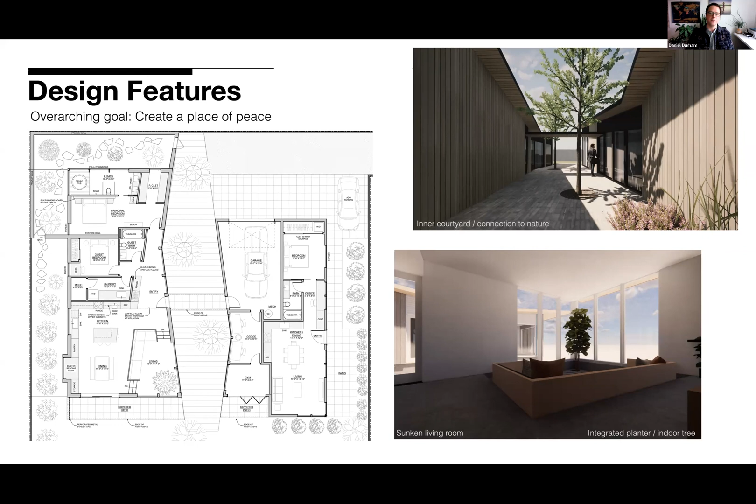So I don't have a ton of time to go into all these cool details, but they're there if you want to hone in on something that interests you. But I thought I'd speak to a couple that are directly related to the IDP process. The first one is because this is a modern home, it has a lot of glass, and a lot of glass that faces south and east. So very early when we modeled it, we realized we had a problem with overheating, or a really high cooling demand. So because IDP is an iterative process, we were able to catch this very early on and adjust the design to overcome that challenge.

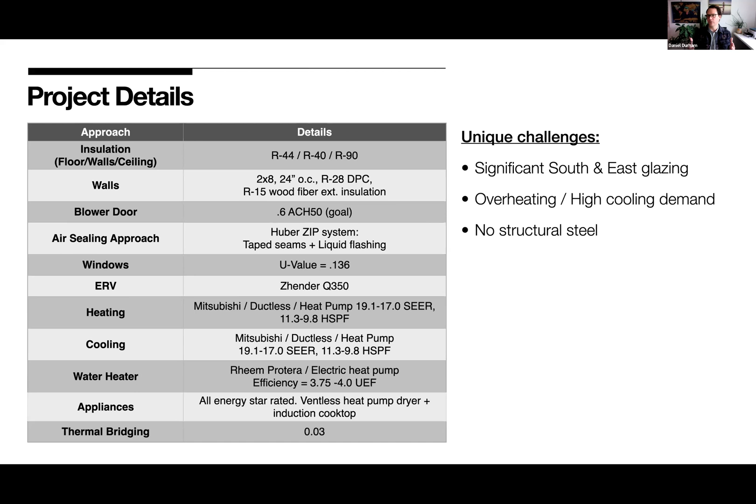So getting into the meat of the presentation here, the IDP principles. I thought it'd be worthwhile to step back for a moment and look at the alternative, which we're all used to, which is the design, bid, build process. That's what I'm most familiar with, and I think that's probably what most people in the design community in this area use. Probably 80 or 90% of them are some variation of that.

What that looks like typically is a client will select an architect or designer, go through programming, schematic, design development, sometimes even as far as construction documents before starting to bring in other professionals to assess the project, such as a builder for pricing or engineering or other trades. The challenge with this is oftentimes a project has so much momentum, so much time, money and energy put into this design, and just emotional inertia, that by the time you reach that point, people are very reluctant to make changes, and they're also very expensive to make at that point.

So what we see far too often with design bid build is that projects will get priced very late in the process and they'll get axed because the client couldn't even afford what got designed. Or another scenario we see is all the cool details are basically stripped from the project just to make the project happen. So I think that is really the epitome of the deficiency in the design bid build process.

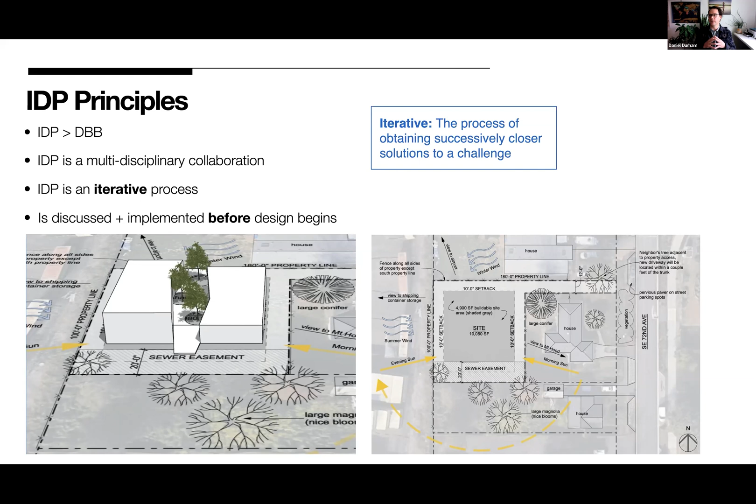The ideal time to implement IDP from our experience is before design even begins. We often share with potential clients that the best piece of advice we can give you is to hire your contractor as early in the process as possible. In fact, we would even recommend that they're hired at the same time you hire your architect or designer. So we'd love to see our industry move more toward that.

So key takeaway number one for me in this process was really the immense value of building one unified team that communicates and cooperates together. I could not say enough good things about this team, Guggenheim's and Dyer Studio and Green Hammer, and the synergy that we created. It was really unique. We had these really free-form discussions and open dialogue, and all ideas were on the table. I think this key step was really the foundation of success.

Key takeaway number two: there's real value in choosing to work with an energy consultant. Looking back on what made the project successful, we had one key meeting. It was actually our kickoff meeting, which Alex Botzel led, and he really patiently schooled us on the principles of passive house and things we should be thinking about early in conceptual design and building orientation. That meeting really set the tone for the project, got everyone excited and aligned on a common goal.

Another real benefit is the opportunity to energy model, which is not just guesswork or relying on your HVAC contractor's load calcs. This is very scientific. And because it's an iterative process, we would typically do some design, have it modeled, get feedback, then tweak the design, get it modeled again, more feedback, and subsequently the tweaks get smaller and smaller. That's really the epitome of an iterative process.

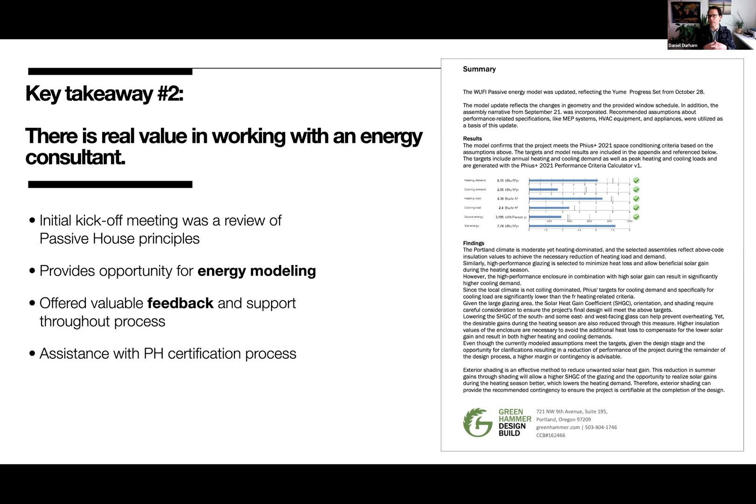Key takeaway number 3 for me was that the continuous insulation and continuous air barrier strategy really has to be considered early in design. Sometimes a project has been designed and then a client will watch some YouTube videos, get excited about high performance building, and decide at the end that they want to make it high performance, and that's just simply not how that works. Unfortunately, I think this is a big reason why high performance building gets pegged as expensive when it's really not if it's done during the design process.

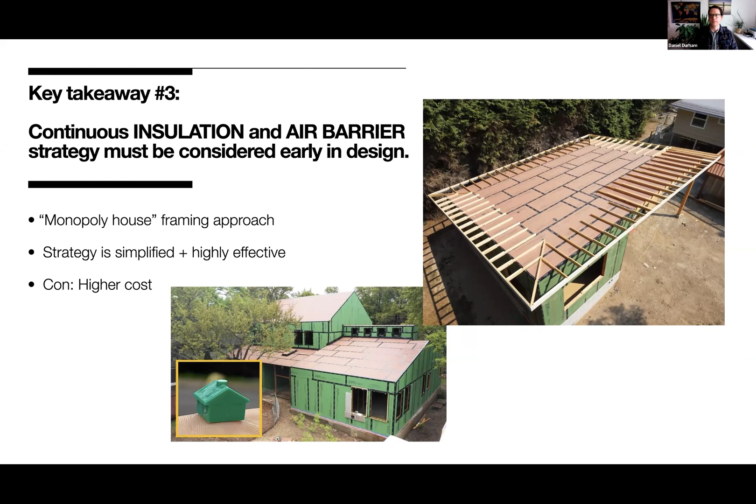From my understanding, this is really the most effective approach for both insulation and air barrier. The one con is it is at a slightly higher cost because you are essentially framing the roof twice, if you will.

So, wrapping things up with just some pros and cons that I found from my own experience with IDP. I think first and foremost, what I love about IDP is that it's proactive. From our experience, we found design-bid-build to be inherently very reactive, and we spend a lot of time and energy and bandwidth sending out RFIs and trying to get information and track down details that maybe we thought should have been included in the first place, where in IDP, that's all done collaboratively and on the front end. And because it's proactive, it's more efficient. Those things aren't being done during construction, but ahead of time.

IDP is naturally a more collaborative approach, which in turn improves relationships. It optimizes build quality, optimizes timeline, and the really big one here is that it optimizes budget and estimating, because it's not just done once at the end, it's done early and it's done often. And because of all that, it creates fewer change orders, fewer unknowns, and fewer RFIs.

So a few cons, if I had to find a couple: it is more time on the front end. That's not to say that it's more time in general, it's just more time up front. And let's be honest, it is new and different to a lot of people. It's not what people are used to, so there is a learning curve. So that does require some educating and selling your team on its value.

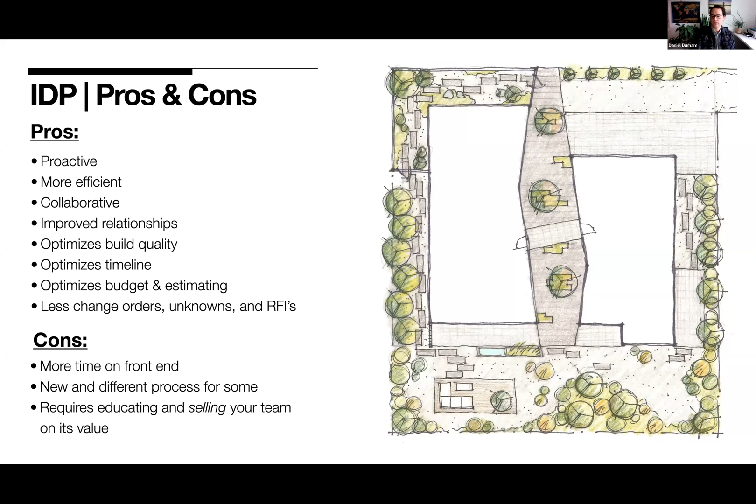So I wanted to open up to any questions out there. There are some really awesome questions, actually. They're perfect. One from Patricia was: I always try to get contractors on projects early, but the difficulty is that contractors don't get paid for their time before construction. So how do you suggest handling this? Maybe hold that in your mind for a second, Daniel, and I'm going to ask this next question because I think you can answer both in a combined way, and I have thoughts too. On the IDP process, does bringing in more professionals for more of the early process mean pre-construction costs are higher, but later costs and timeframes will be lower? That was from Misty Ersman. So maybe take a shot at those, Daniel.

That'd be awesome. Yeah, to answer the first one, that's close to home, because I think that's really a belief more than anything, that contractors aren't paid for this. A couple years ago, we switched to actually charging for cost estimates and early consultation. I think we're probably one of the few that do this, but it's a ton of hours each year that we were spending just donating to projects that a lot of times didn't go through. So I would encourage you to talk to your contractors about charging for this process. It's their time. You're in business to make money. There's no reason that we should be giving away hours and hours of consulting for free.

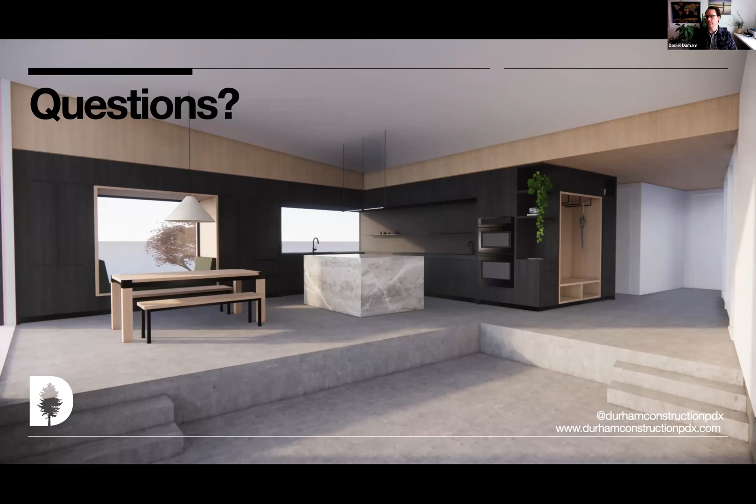Yeah. Great. I think that's good. We probably should get moving on. Those are really fantastic questions. There's some other general ones maybe we'll hit at the end, depending on timing. And thank you, Daniel. It was a really cool project. I can't wait to check that one out, both in construction and then after. It's a really beautiful design, and love the concept. So yeah, super exciting. Thanks, Evan.

All right, Melissa Mulder-Wright. So really pumped about this project and presentation too. Melissa's really passionate about this work, and excited to see what you've got for us today. I think you'll get some good questions. A lot of people are thinking about wildfires these days, and hopefully the heightened snowpacks will reduce that this year, but it's definitely a part of design and construction moving forward. So this is a really important topic for everybody. So thanks for bringing it to this SHP day.

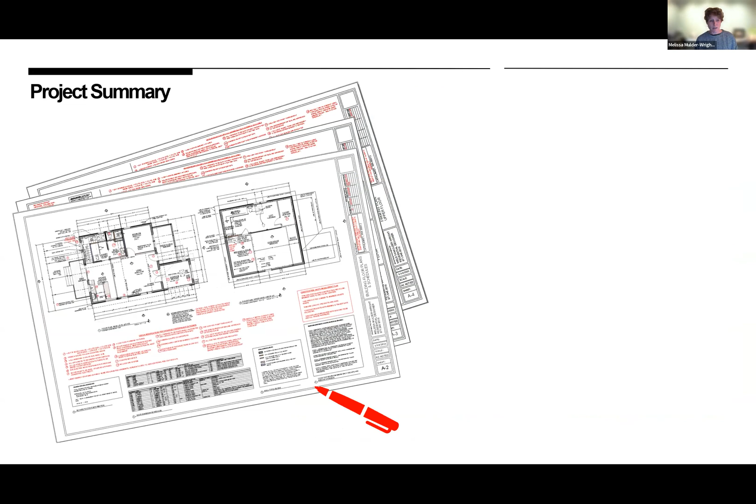And he wanted it to blend into the adjacent properties. He wanted it to be pretty simple, wanted it to look like a cabin, wanted to be able to do lots of gardening on the property. And he also didn't want his house to burn down. And he was also concerned that being in the middle of nowhere, his power would go out and he wouldn't have any resources. And so those were some of the main things that we considered during the design process. Like I said, we ended up not going through with the construction of this building.

I'd like you to think back to what 2020 was like. That was when we were working on this design process. We started late summer of 2020. And what that meant is we were all mostly inside. When we got together, we were masking. Everyone and their dog were trying to retrofit their homes to make offices in their homes, trying to build something better. People were not spending money on vacations, and so they were wanting to put money into construction. And at the same time, manufacturing companies were not able to bring people in. And so we had a lot of materials shortages.

I also want to remind you that Labor Day of 2020, we had a lot of wildfires around here. And so if you are somebody who has a property in the middle of nowhere with lots of trees and you want to build something new, this was a pretty frustrating time. And so while we put a lot of effort into designing the best home possible, in the end, the homeowner decided that the easier thing would be to order a kit home and have the whole thing show up on a flatbed truck. And then they could construct it easily and not have to worry about the material shortages and things like that.

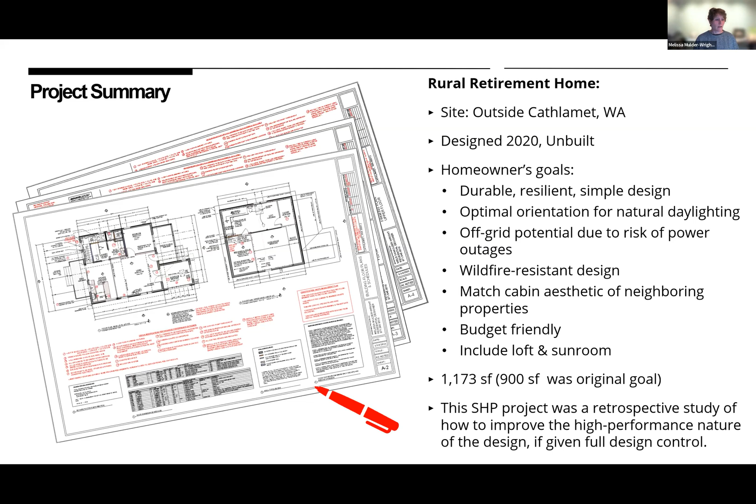So for this project, I just went back and I redlined all of the pages in terms of how we could make this a better project. And some of that is interesting, but actually I think the things that are more interesting are the things that I'll talk about today in terms of how to really maximize the off-grid potential and the fire resistant design features.

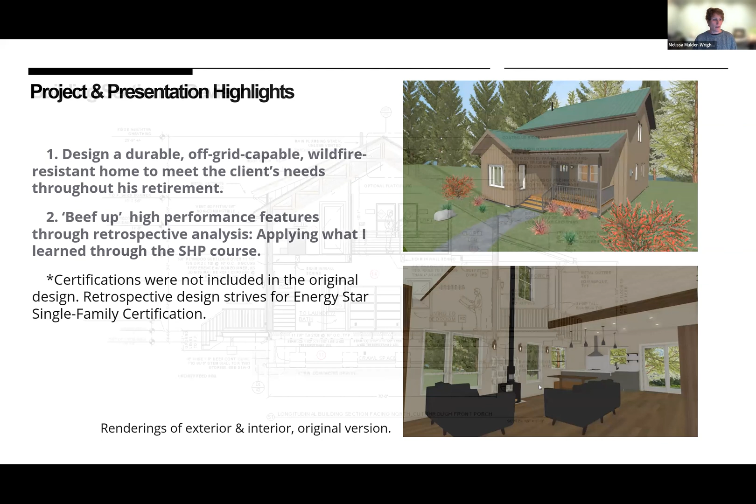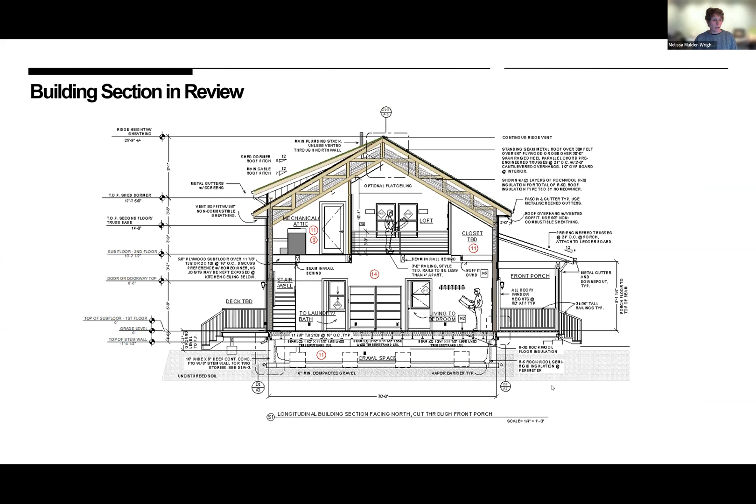For my Sustainable Homes Professional project, I went for Energy Star single family certification. Just a side note, in the learnings that I've had since that time, I would actually think that this would be a great passive house project because passive house focuses a lot on really maximizing durability, airtightness, and a lot around healthy materials. And I think that the fire resistant design would also be a great thing to highlight. I'm going to kind of cruise through some of these slides to get to the juicy stuff.

So in the original design, one of the features that I was working around, the homeowner had a set of windows that he'd already purchased, and he wanted all of those windows to be used in the home. When I was able to go back as a retrospective look, I could switch out all those windows and choose things that would be better for the performance of the house and fire resistance of the house.

Some of these would be using triple pane windows that are tempered. That's great for the air sealing of the house, especially if you're mindful of sealing around the windows. It's great for R value. In the original design, we had specified exterior insulation around the entire house. In the new design, I just beefed that up to get more R value out of the process.

Specifying things like good balanced ventilation, that would increase the healthy interior of the house. It would also improve the durability of the house. And all of this is to think like, if the house is in the middle of nowhere and your power goes out, you want this house to have a nice cozy sweater on it. So you're maintaining good interior air temperatures. You want it to be warmer in the wintertime, cooler in the summertime. And all of this can be done by really making sure the enclosure of the house is nicely detailed.

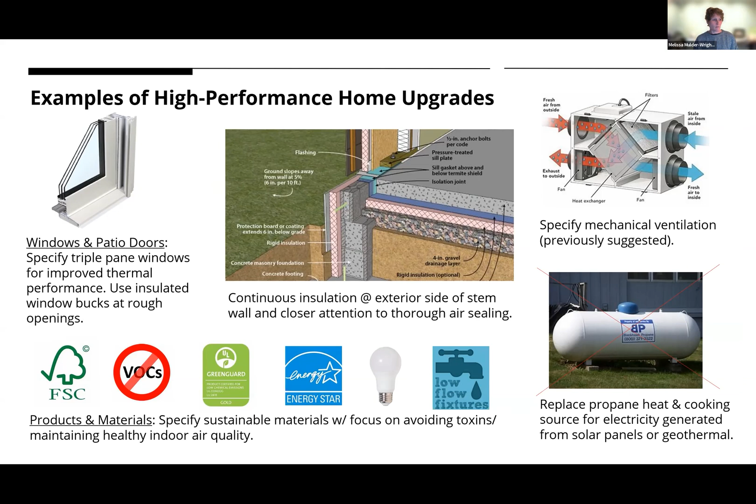And like I said, if I had to do it now, I would go with passive house standards, which is really focusing on continuous insulation, airtightness, orienting the house properly. That had already been done. Making sure there's good ventilation on the interior, and minimizing the sizing of the mechanical systems.

One of the opportunities that we had at the site was the opportunity to use rainwater collection. It was a rural site. There were some farms nearby. Something like great big cisterns to collect rainwater runoff off of metal roofing would have been great for the homeowner's garden. It also would have been a great opportunity for some of the fire prevention or reacting to fires should there be any.

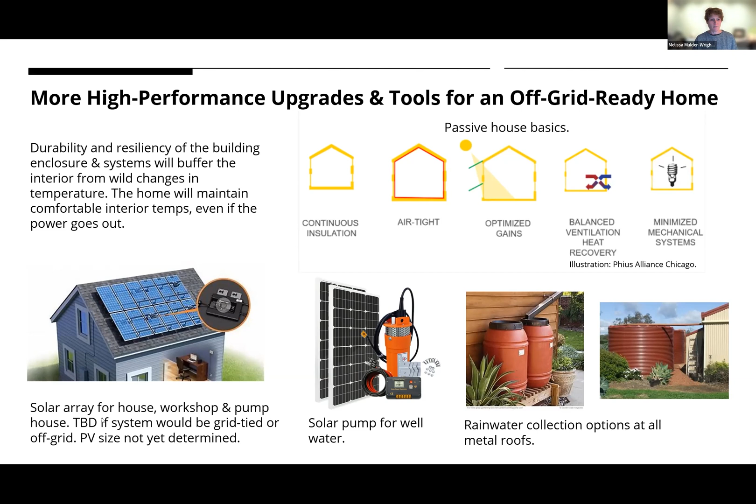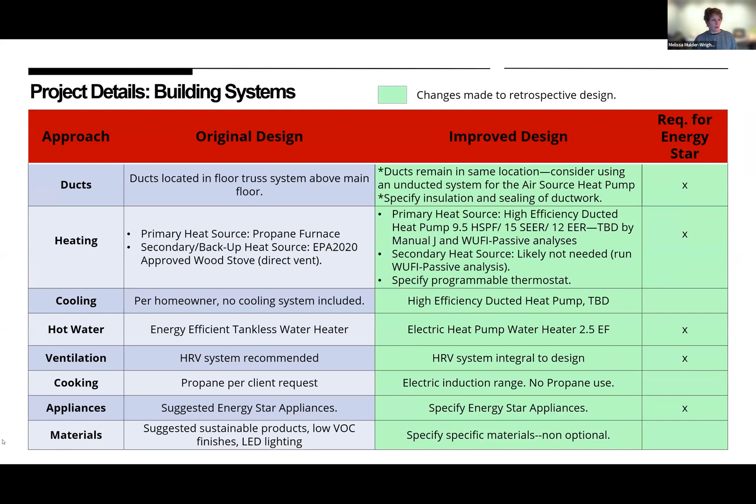These are just some examples of some of the upgrades that I made to the project as I was going through for my final project. But I think the more interesting thing right now is to look at some of the wildfire features. Like I mentioned, we had used some exterior insulation. In the original design, we had called for that to be rock wool material, which is resistant to fire. We'd also included a rain screen.

And one of the things that you often see in rain screen detailing is to have 2x4s on the flat. And that means that you have 1.5 inches of air gap between the exterior cladding and the rock wool insulation. One of the things that we're learning is that fire embers are smaller than 1.5 inches. And so it is a better opportunity to make sure the rain screen is between 3/8 of an inch, maybe 3/4 of an inch, to minimize the potential for embers to go up through that ventilation cavity.

You also want to make sure that you have a metal blocking at the base of that rain screen. That is good for bug protection, and that metal grate has very small mesh fibers that prevent embers from getting up in there. You can also choose soffit vents that close automatically. They're called Vulcan vents, if there's a fire event. Making sure to use a continuous ridge vent at the roof that is made out of metal and has blocking on it to prevent embers from getting into the ridge venting. And again, the windows being triple paned and tempered is another way to keep the outside of the house safe.

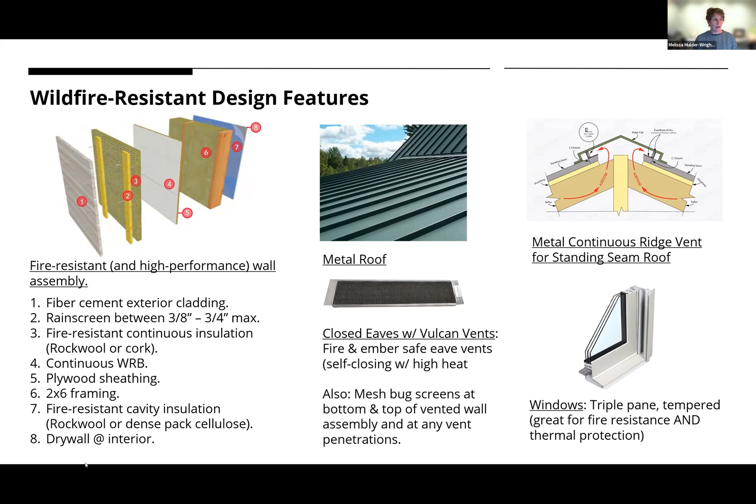At the time of the original design, we also spent time thinking about how to protect the landscape of the area, considering the proximity of those trees. The homeowner was really skilled at landscaping and was really ambitious about how we could use other strategies like keeping branches away from the house. Like one of the recommendations is 30 feet from any of the buildings or the decking to the tree line, keeping dead debris away from the house, using rocks as mulching, making some clear planning around what kind of plantings would be used.

And then the materials that we would use would be things that would be less likely to burn, and then protecting those by having metal screens around the deck and porch and things like that. There are a lot of really great resources, especially after those 2020 fires, checklists even. I've included them at the end of my presentation.

One of them that I've highlighted here is through CAL FIRE. If you Google that, there's a really excellent checklist that talks about how to safeguard your house from the outside, including the landscaping, how the house is built, materials used, and actually as a community, how you can respond to wildfire protection to protect one another.

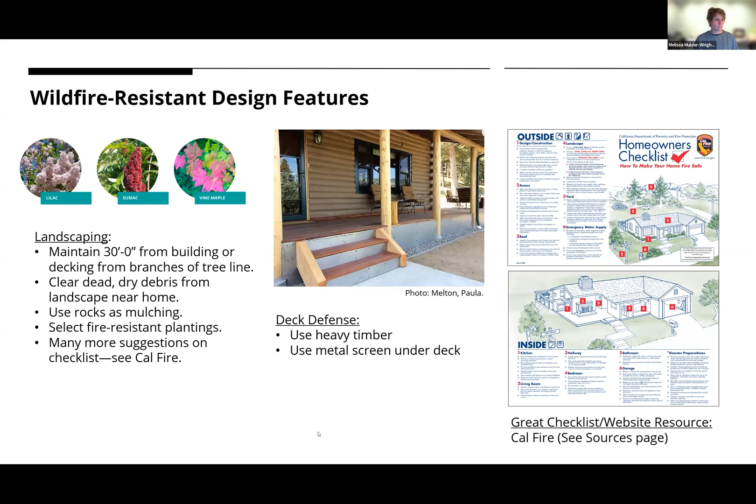So I think one of the things that I also want to highlight is the importance of always learning, always keeping your skills fresh. I think sometimes we run across folks who have been doing this for years, and there's a lot of comfort in always doing the same thing and perfecting your design skills or your build skills without changing things. But I think we have a real opportunity to learn from what other folks have learned along the way, how to make buildings better, more resilient, more durable, healthier for us to live in.

And as a designer, I really appreciate the collaborative opportunity that I get from working with other tradespeople, other folks who have businesses. And I really enjoy the opportunities that I get from working with my clients, who often are sharing information that I didn't have. And we can have a lot of discussion around how we can design the best possible house for their needs.